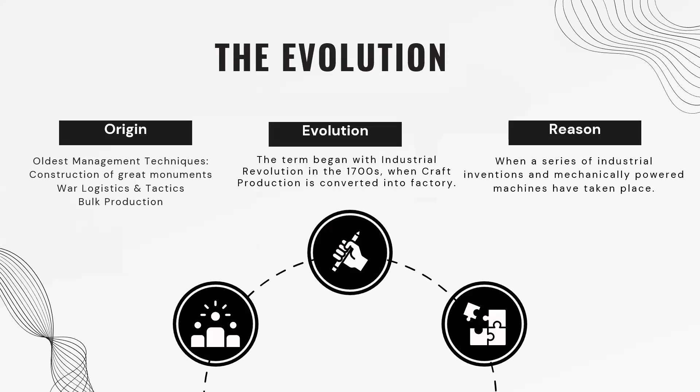This is operations management. Okay, so as of now, in our last session, all we have seen is how this operations management concept evolved, and then we discussed the process. What is the whole process of operations management? I mean, what are all the components which come under the input factors, what components happen in the transformation process, and what will be the outcome.

So companies, the brands, can produce or manufacture their products, or give their services, or share their technology or information to their customers. So whether it is a physical product, a tangible product, or an intangible product, everything has a strategy and a plan in the earlier stage: what type of product or what kind of service the brand wishes to give to its customers. So once the strategy and plan are ready, they go for designing the product, the service, the technology, or the information.

And once the design is ready, then they go for procurement. They procure resources, people, manpower, all the physical components required for that. And then they go into manufacturing, processing, or assembling the product or service. And finally, they deliver to their customers through any of the marketing channels, or sometimes a few brands deliver the products directly. So this is the whole process of operations management.

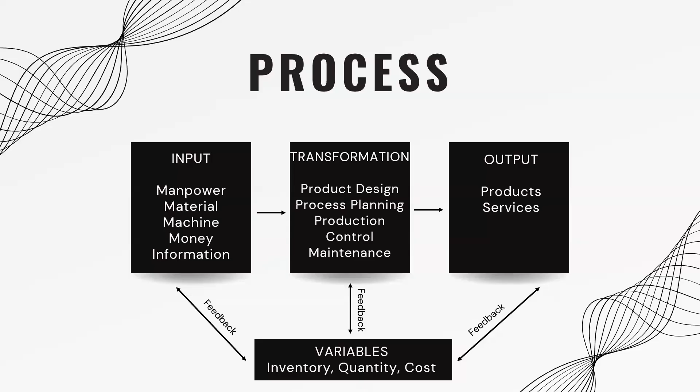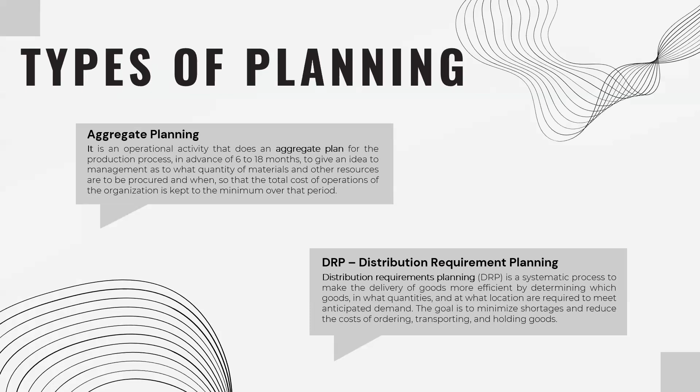So then we discussed the difference between plan and strategy, and we then went through the types of planning. One is aggregate planning, that is before the production, and DRP, distribution requirement planning, which happens after the production. That is, what to plan before production and what to plan after production. Then we discussed types of strategies: level strategy, chase strategy, and hybrid strategy.

This is done to avoid the concept of storage and warehousing. Instead of buying and storing the resources in advance and spending too much money on it, the company goes for cost saving. So they want to avoid storage and warehousing, and that's why they choose just in time. And we have seen the advantages and disadvantages.

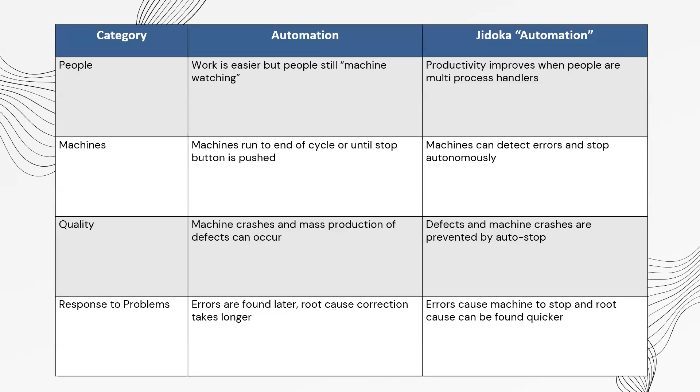And then we discussed Kanban. Kanban is a kind of a live working board, which displays all the information about what is to be done or processed the very next day, or for the whole week. So it will have everything: how many machines have to be operated, how many workers have to be assigned to each machine, the names of those workers, what time they have to start work and by what time they have to finish, the number of units to be produced on each machine, where the quality checking has to be done and who's going to do the quality check, and all the information related to the operations process.

So it will be displayed in a kind of a board. So that's Kanban. And Kaizen is continuous improvement.

That is as per the market change, as per the prevailing trend. So the company continuously goes for a change in their process as well. So they are not going with the rigid process of manufacturing or designing or planning, but they go with the Kaizen process. That is continuous improvement.

So each and every component is important in this operations process. Not only the manufacturing unit, not only the production unit, but the involvement of the procurement department, the stores department, the warehousing department, the transportation department, and the packing, packaging and labeling department. So everything is integrated. It requires the integration of various functions like supply chain, quality control, inventory management, and human resources.

So what is the scope and functions of operations management? To what extent will managing the operations be a very successful process? It covers the entire production life cycle from product and service design till delivery. So the complete supply chain is covered here. And the key functions are managing the capacity, the inventory, the quality, the whole supply chain, improving the process, and project management.

And it's cross-functional as well because it integrates with other business functions like marketing, finance, and human resources. It's applicable in manufacturing, in the service sector, in healthcare, and in logistics. In the manufacturing unit, by optimizing the production processes, inventory, and supply chain management. And in the service sector, it helps in improving service delivery, capacity planning, and customer experience.

If you take healthcare, it enhances the patient flow, resource allocation, and overall operational efficiency. And when it comes to logistics, that is the transportation of goods and services, it streamlines the transportation, warehousing, and distribution networks.

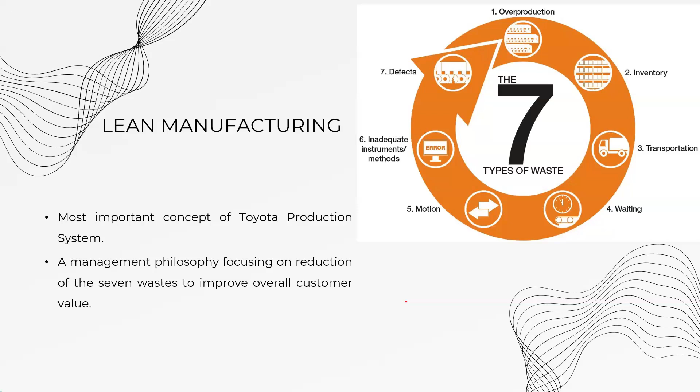Key principles of lean manufacturing are pull processing, perfect first, waste minimization, and continuous improvement. Pull processing is products are pulled from the consumer end. That is, only when the products are ordered by the customer, according to the number of orders, then the manufacturing happens and the required products are delivered to the customers who have placed the order. So there is a pull principle or pull processing.

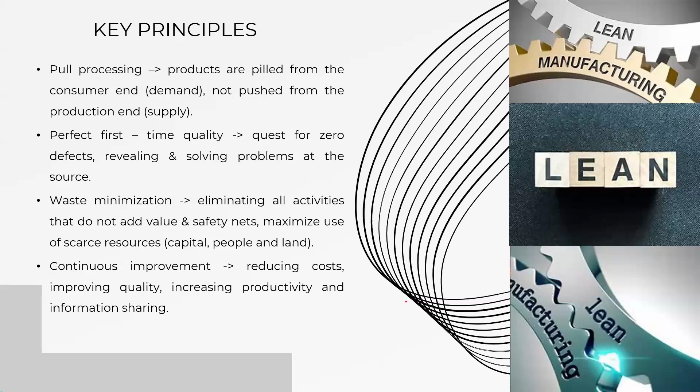And perfect first, that is time quality - first of all, zero defects, revealing and solving problems at the source level itself. Then managing the waste, minimizing the waste, eliminating all activities that do not add value and safety nets, and maximizing use of scarce resources. Then finally, continuous improvement, that is reducing the cost, improving the quality, increasing the productivity and information sharing.

So what is the difference between traditional manufacturing and lean manufacturing? The main difference is the flexibility part - that is producing different mixes or greater diversity of products quickly without sacrificing efficiency at lower volumes of production.

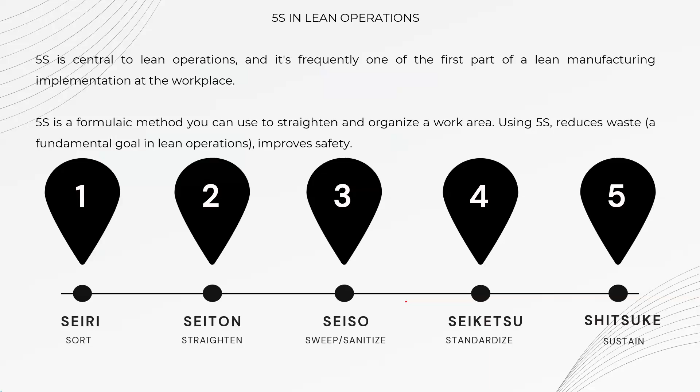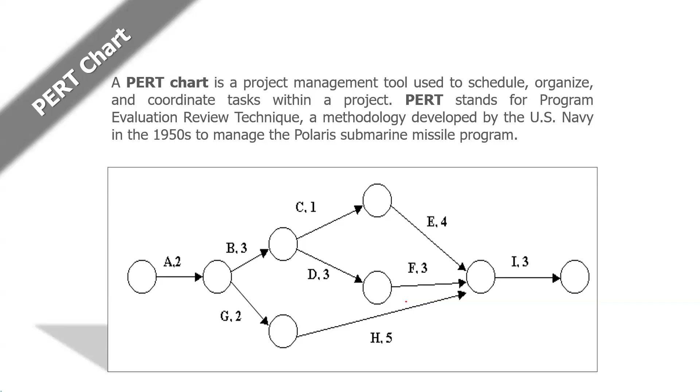Okay. And we have this PERT chart for measuring the operations or measuring a complete project. It's a tool used to schedule, organize, and coordinate tasks within a project. PERT stands for Program Evaluation Review Technique, and it's a methodology developed by the U.S. Navy in the 1950s to manage the Polaris submarine missile program. So it was started in a military environment, but it was then adapted by manufacturing units as well. So it is used to schedule, organize, and coordinate tasks within a project.

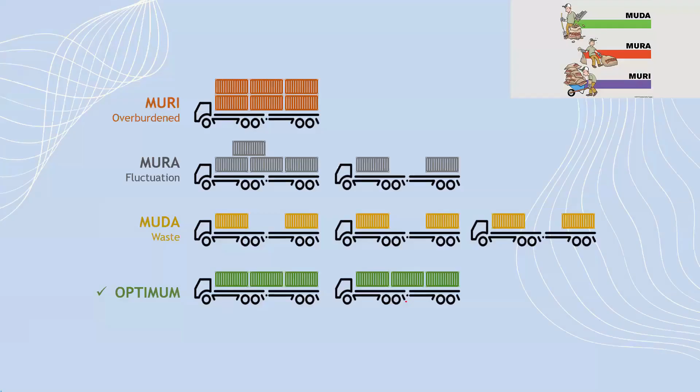So with this we have come to the end of the session, and I think I have covered all the 10 techniques which I listed previously. Let me check. Yeah, yes. So all these 10 techniques have been covered in our last week's and today's session.